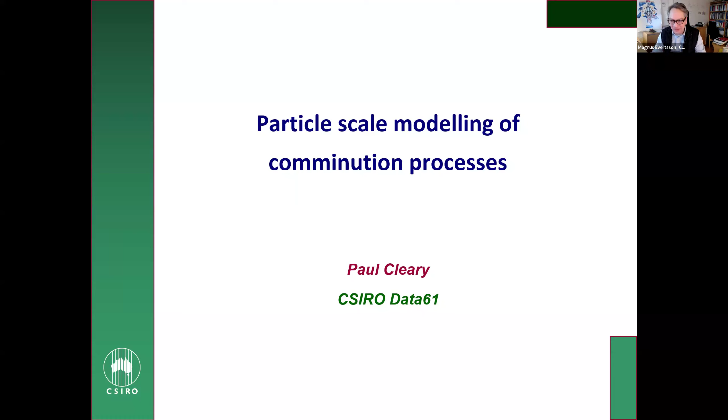Well, thank you very much. I have to start with a comment for Magnus, who looked like he was trying to rotate his camera into the opposite position, so I think he was trying to make us in the Southern Hemisphere feel comfortable. Might have been. Okay, sorry for that, I was changing between my computer and my phone. No, that's all right, it just looked like you wanted to be in the Southern Hemisphere with us. Yeah. I panicked, I didn't want to have the sound echoing.

Anyway, Malcolm, thanks for the introduction. And I have to say, I didn't really need to have quite so much detail about your pajamas, but good to know you're warm.

Okay, let me start then. So the title I've opted for is Particle Scale Modeling of Comminution Processes. A question for whoever's chairing: do you want to take questions as we go through, or have people wait till the end and run out of time? They will wait for the end. Yep, okay.

Okay, so I'll start by acknowledging contributions from collaborators. Core people from our group who've worked on this for a long time: Matt Sinnott and Sharon Cummins, then Gary Delaney, who's worked on the 3D particle breakage, Nick Stokes for a long time, David Thomas, who's our lead software engineer, the CSIRO Workspace software team, as Malcolm mentioned, and Rob Morrison. I think, Malcolm, it's 22 years now, maybe 23, but who's counting? And then I'll show you a few things from our digital human work, in conjunction with Simon Harrison and Ray Callan.

A little bit of an outline of what I'll talk about: introduction to the particle methods, so for us that's DEM and SPH. DEM, I expect everybody knows and is very familiar with. SPH, maybe yes, maybe no. I'll show some application examples so you get a reasonable idea of the breadth of what we do and the sorts of applications we've been looking at, at various stages. Then I'll talk in more detail about breakage in DEM, then focus on a couple of crusher models, and then talk about the complete SAG mill model, which is becoming a very complex model with a lot of moving pieces.

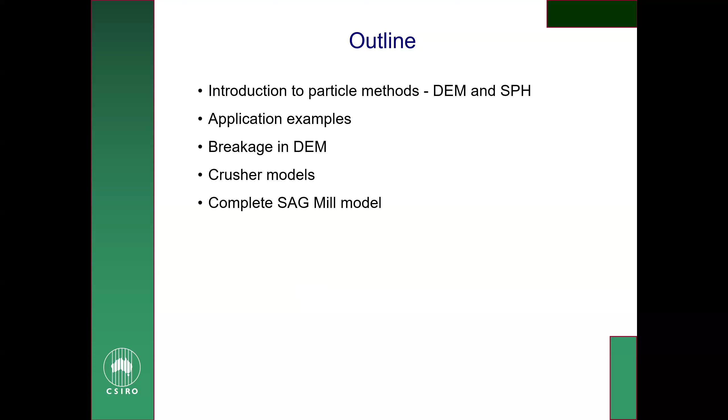Okay, so the particle or computational methods we use, DEM and SPH, provide a way of looking deep inside the equipment and understanding, getting data and information on things you can't really measure or see traditionally. The DEM method, I think everybody should be familiar with - you're basically tracking a whole lot of particles with different sizes and shapes, predicting the interactions with the environment and the collisions between particles. So it's a method to track particles, and collisions is the principle of physics.

The SPH method is a continuum method, but it's a meshless Lagrangian continuum method. We actually use it in several different ways, in particular for modeling fluids, but also to model solids and first principle fracture of solids and elastoplastic solids. Basically, it's a continuum method and you're solving PDEs - if you can write down a normal PDE, or solve it with finite element methods, you can use it in the SPH method. That gives you the advantages of being able to track complex free surfaces at no cost and follow complex multiple materials.

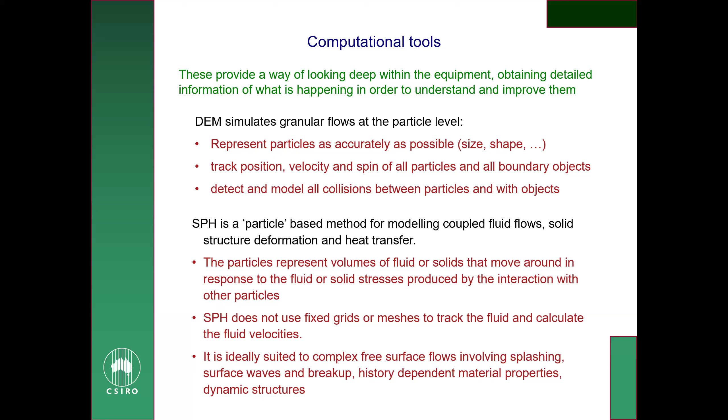So this is a rough phase diagram trying to explain how our methods fit together for what we do. We're using DEM for the collisional dominated interactions for breakage, segregation, cohesion. At the bottom we've got SPH for fluids, elastic solids, elastoplastic solids, membranes, phase change, thermodynamics. And we're often coupling the DEM and SPH methods together in different ways.

We also use some traditional grid-based methods. We use finite element methods for some things, particularly structure deformation, and finite difference methods for modeling gas flows, particularly coupled to the particle methods. Biom is biomechanical models, and I'll show you a couple of those - that's essentially what we use for modeling humans or parts of humans. We also use a little bit of Lattice-Boltzmann methods for permeability measurement, but also for mainstream fluid mechanics.

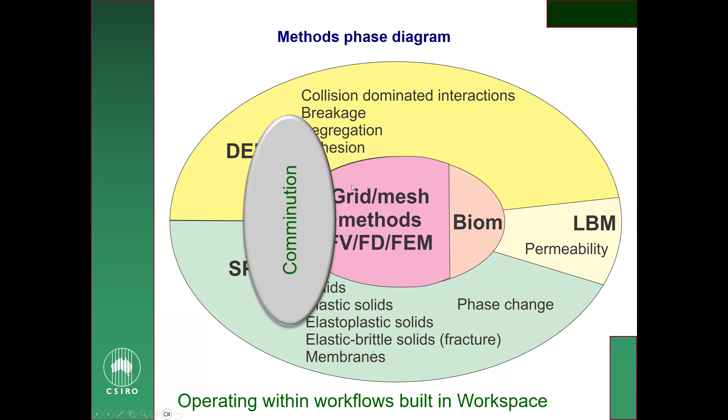So comminution sits across several of these methods, but predominantly uses DEM with SPH, and sometimes a little bit of finite difference if we need airflow in there. The human environment stuff, I'll show you a few examples of that. That covers the areas. We work in lots of other areas, but I won't show those on the diagram.

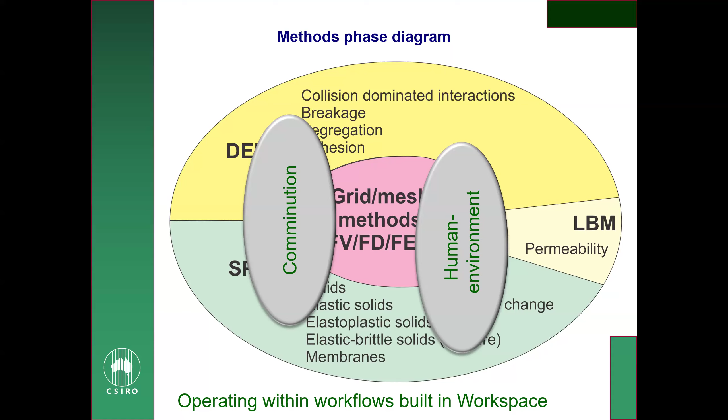Okay, so here's a very simple SPH simulation - this is just pouring milk into a glass. What we've got here is a free surface liquid coming from an inflow. It comes into the glass, hits the wall, spreads out, becomes very thin and undergoes a ligamentary instability, which causes it to break up. When it gets to the bottom, it starts to flow across the bottom, and you get collisions between different parts of the flow, and ejection of fluid in the free surface and splashing.

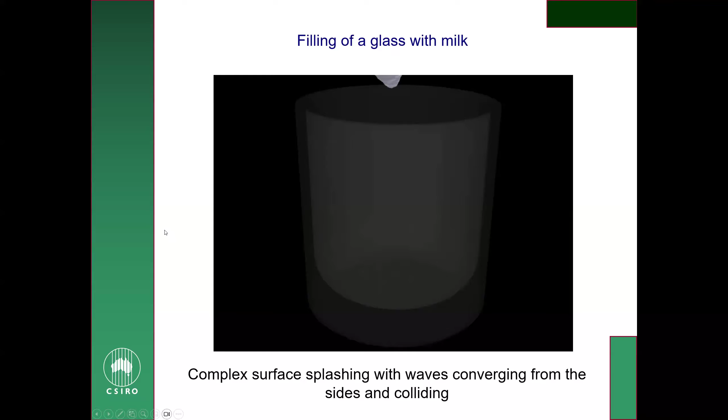Many of you will have seen this one before - it's a common example I use to show SPH for somebody who's not familiar with the method. You can see the complex free surface behavior, the waves breaking, the collisions. SPH is a method that's very well suited for complex free surface flows.

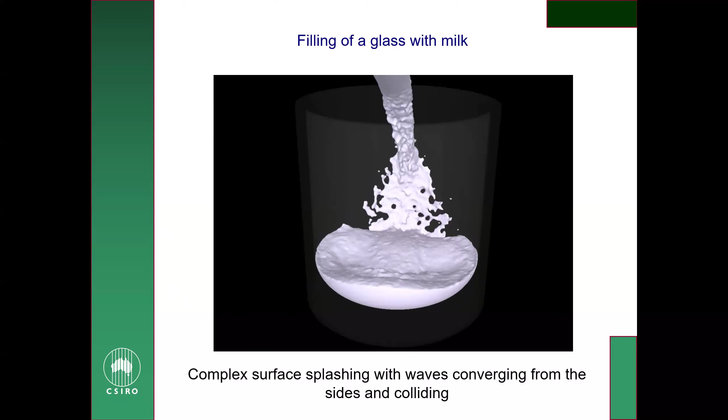A similar sort of disaster scenario - this is an open pit mine where you're interested in slope stability, and if the slope collapses, where that material goes. This is a section of an open pit that's fragmented. The majority of the rock, even though fractured, is still relatively stable and sits at a relatively high angle of repose. But the mobilized rock that has flowed is still sufficient to flow significantly along the sides to fill a reasonable fraction of the side of the open pit, and will destroy any infrastructure and kill anybody in between.

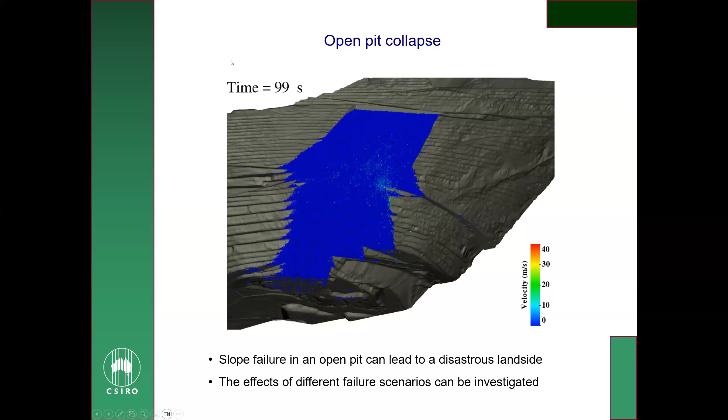So this is an area that we occasionally work in as well, related to mining. Okay, a quick overview across a whole range of different areas here - I won't talk about any of these in much detail. The first one is separation, so lots of different types of machines to separate.

At the top here we have a simple example of a small section of a vibrating screen, spherical particles on the left and non-spherical on the right - I'll set them running. Bottom left we've got a double deck banana screen, and on the bottom right is the banana screen with a modest level of cohesion. You only need a small amount of cohesion, say interstitial fluid, to completely block the banana screen up. You'll see here that the spherical particles peg the holes very well - they get very different behavior.

So shape is critically important in separation flows. In fact, in all the granular flows we're interested in, particle shape is critically important, and you always need to include that.

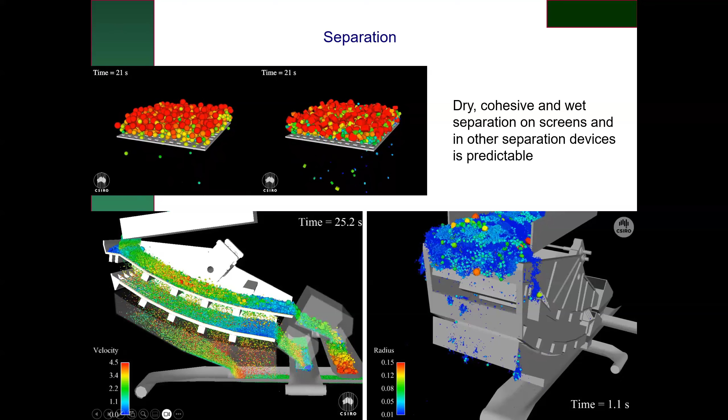We've got a bunch of crushers - gyratory, primary gyratory, cone crusher, horizontal shaft impactor, various roll crushers, hammer mills, shaft impactor, double roll crusher, roll crusher. I'll show you a couple of these later, so I won't show you them now.

Then we're interested in coarse grinding, so we've got sag mills, HPGR, vertical roller mill, various tumbling mills, rod mill - I'll come to the sag mill model and we'll talk more about that there. But also fine grinding, so tower mills, IsaMills, and lots of those as well. So we use these models across the full spectrum of the comminution process.

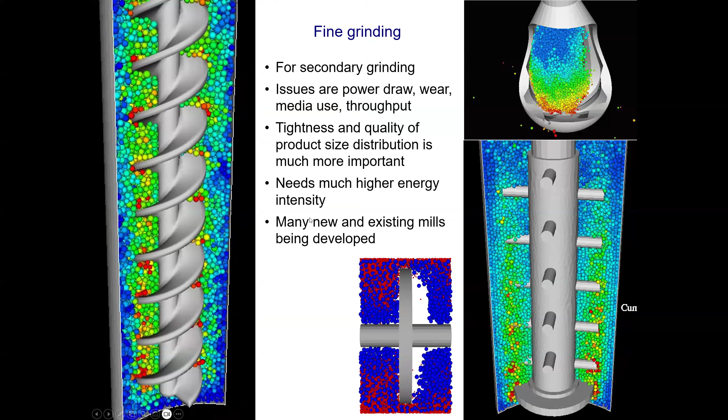We're also interested in mixing, sometimes mixing in the comminution device, but often in manufacturing processes. So this one's a four-blade plowshare mixer. We've got a whole range of other machines there. We're interested in the nature of the mixing process and the quality of the mixing.

Does it fully mix, and to what degree are the dead zones and unmixed regions? So it's actually not a good mixer at all. It's not particularly good, but you can see inside and see what they're doing.

Storage and transfer of bulk materials, so all sorts of hoppers and containment devices, transfer chutes. This is transferring between one conveyor up here for a very complex inverted chute onto another dump below.

Here we have a hopper where once you include the particle shape, you can directly predict arching as emergent behavior, without having to rig the DEM model to try and force it to produce that shape. Again, very, very important in all these applications.

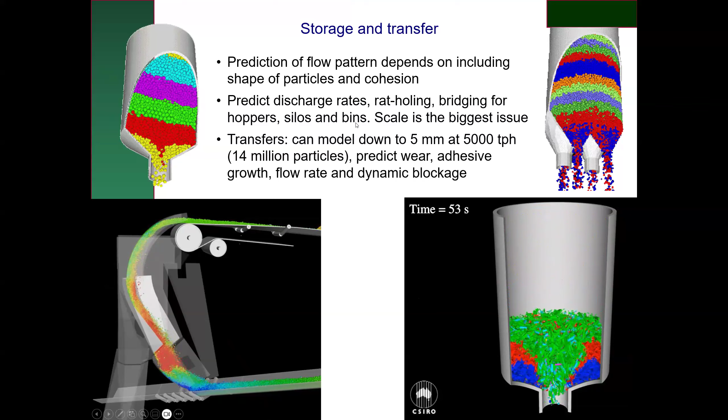Now, this is just the first of the examples I'll show you for the digital human model. These are basically cases where we have a human introduced into fluids or solids. In this case, it's actually Olympic swimming.

The mathematical structures we use here are the same for the mills as they are for, say, the swimmer. So the framework's very versatile, which can range from humans to machines.

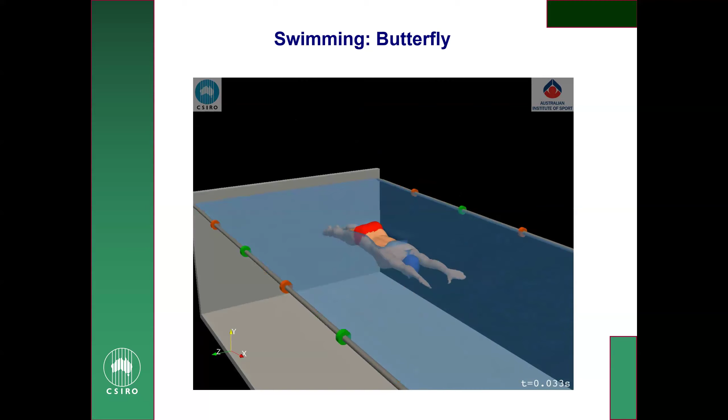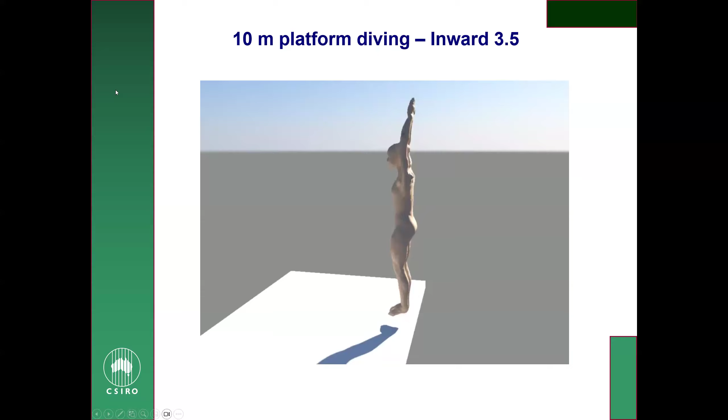Also look at things like platform diving. So this is again an Olympic athlete doing an inward three-and-a-half somersault dive. Complex biomechanics followed by the body doing complicated things, interacting with the water.

The last of the general examples I'll show is additive manufacturing. So this is a particle bed. In this case, it's titanium grains, which are about 20 microns.

We've got a laser. In this case, the laser is rendered as purple, so you can see where the laser heat source is. The laser deposits heat on the surfaces in proportion to the view factor of the grains.

The grains are modeled as SPH clusters of particles, and that means that we have both the discrete nature of the grains, but we also have the continuum model within the grains, which allows us to predict the internal convection or conduction and melting of those grains.

And then once they're liquid, we get a transition from a granular system locally to a liquid system. The liquid flows under pressure from the laser and forms a solid.

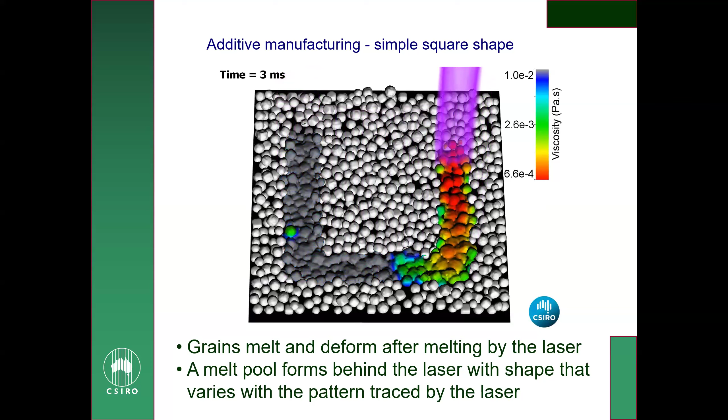So I'll play that, we'll see how it works. You'll see the laser moving on. The colours show the viscosity, which is red for free flowing, and the other colours as it solidifies.

The dark grey shows you the material that's really solidified. You can see the dark grey is what the particles are all smeared and merged to get to from the original grains. The way this process works is you lay down a layer of beads, you do this process.

Then you put another layer of grains on top of those, and then you do it again and build up the layers progressively. So this model is a sort of hybrid DEM-SPH model.

It's got DEM components because it's dealing with grains that are stuck together, but because we want to do the internal heat transfer, the solidification and the melting, and then solidification again, we've got all the SPH continuum parts to provide us that.

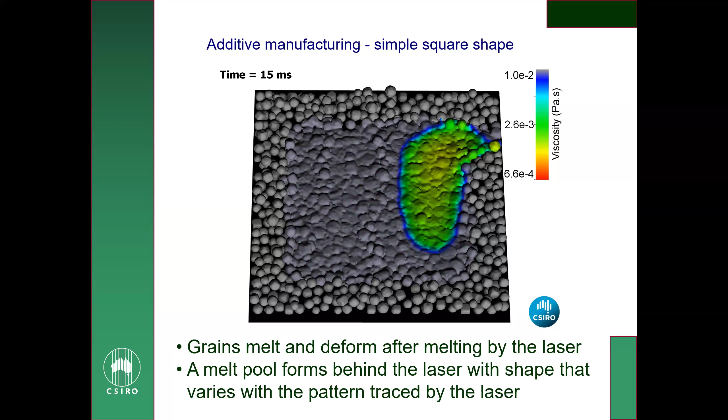Okay, so talk about breakage, rock breakage modeling in DEM, at least the way we do it. This is the basic elements of it without too much detail.

So for compressive breakage, we're using an elastic threshold strain energy. And for impact breakage, we're using the damage energy, or incremental damage, which is the energy in a collision that's above an elastic threshold, which everyone tends to call E naught.

So in the impact case, we're measuring the accumulating damage energy. In the compression breakage case, we're looking at the elastic strain into particle contacts. And those give you the information about when a particle should break.

Once a particle is broken, then what we do is we replace the fracturing parent with an appropriate assembly of daughter particles, all of which are non-spherical. They're packed into the space that was originally occupied by the parent.

Progeny size distribution essentially comes from the more recent updated version of the T10 model, so basically driven by drop weight or breakage test data, but including size effects. So we have an extra parameter on top of the traditional ones that takes into account the size dependence of the

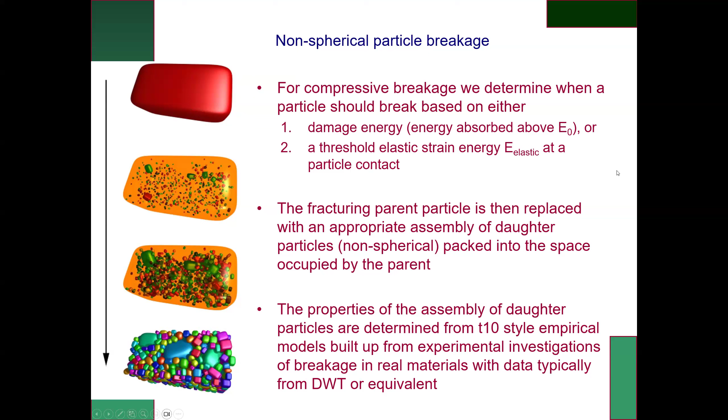Just to show you how it works, this is an example of two relatively equal-sized particles colliding at high speed. There's 100 millimeter particles, resolved down to 1 millimeter.

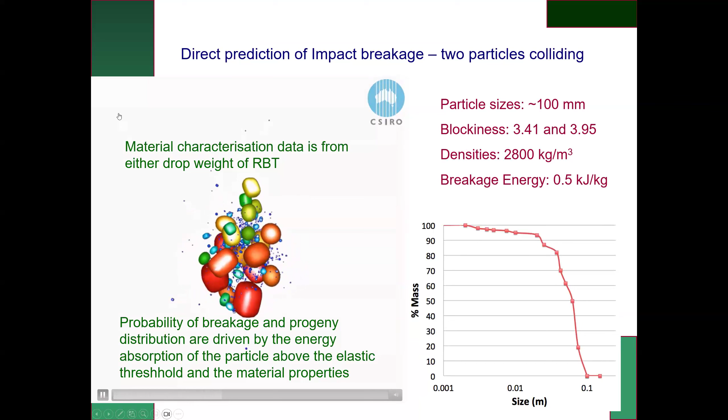And you can see the replacement models that occurred instantaneously. The progeny are then free to move, conserves energy, so the original energy that remains above the energy dissipated by the elastic part of the collision remains energy inherited by the progenies, allowing them to move into each other and spread out with that energy.

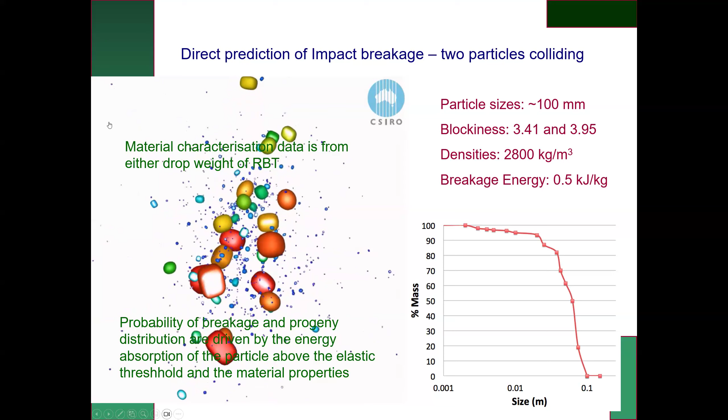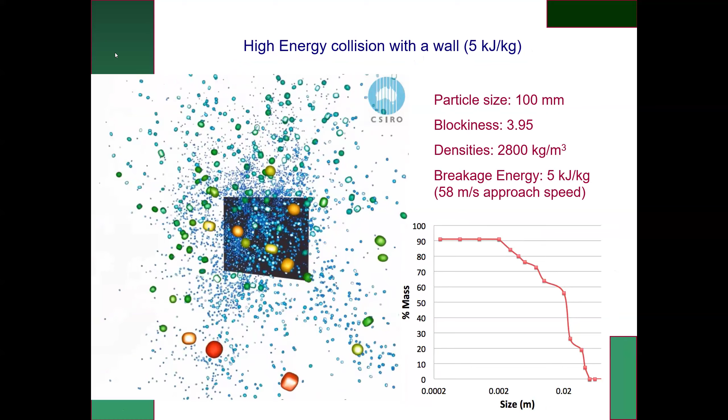So I'm going to talk about the size reduction mechanisms that we're using now in the DEM model. We've got 5 of those, depending on how you count them.

So traditional single impact body breakage is mechanism 1. Mechanism 2 is the incremental damage theory, which essentially is body breakage as a consequence of the accumulating damage from the energy above the elastic threshold that it accumulates.

So essentially each time you have a collision, there is a probability of breakage that depends on how much damage has occurred. Then if it breaks, the accumulated damage energy then determines the breakage event, which controls the size distribution of the progeny.

We've got 3 surface loss mechanisms. The first one we call chipping. This is for an angular particle, the preferential loss of corners and edges due to impact.

So if you have a particle with a sharp edge and you hit it, say 45 degrees near that edge, you can actually shear off a whole large piece of it. So you don't necessarily need a lot of energy input, but you can remove quite a bit of mass from it, and its impact is to round the particle by removing the corners and edges quickly.

So chipping is a more efficient mechanism, but it'll lead to a rounded particle, and at that point the chipping slows down and eventually won't occur.

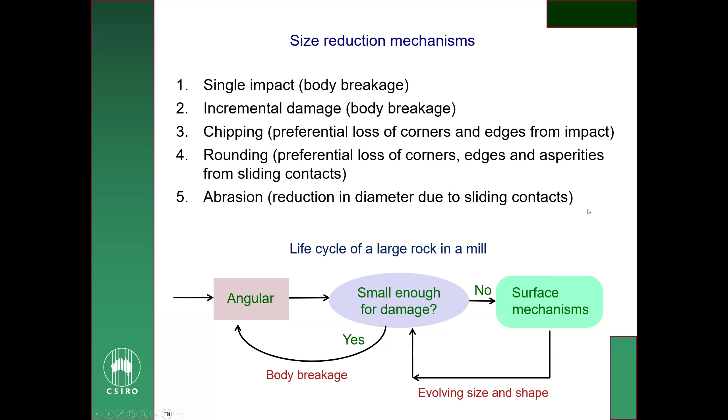So the surface loss mechanisms are all the accumulation of very large numbers, hundreds or thousands, of little impact events, each of which takes a little bit off a corner or an edge, and then progressively leads them to become rounder, as well as grinding down to become smaller.

Now, if we had the incremental breakage mechanism switched on here, those particles are now small enough that the energy delivered to them is big enough that those particles could then break. This example is just showing the surface loss mechanisms.

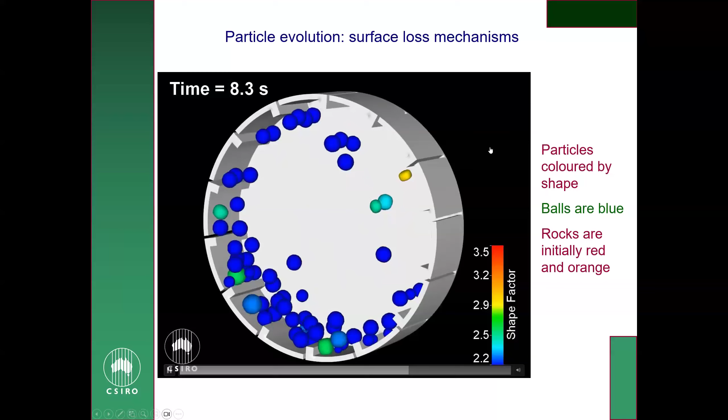Okay, so now we'll jump over to a few crusher examples. The first one's a jaw crusher. This is, as usual, using the particle replacement model I described. It's a compression crusher, so the determination of breakage will be done by the stress on the particle. As usual, the progeny is determined by the T10 model, and again, particle shape is critical.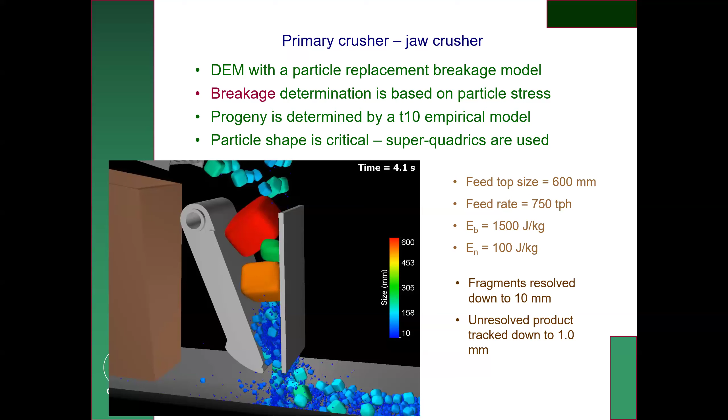Okay, now the next jaw crusher I'll show you is quite a different one. This is the last example I showed you from the digital human side, a complete model of the human mouth. Essentially, this is where the jaw crusher gets its name from.

You've got two opposing sets of surfaces that cyclically compress and apply stress to the material in between. In this case we're not showing the lower part of the mouth, the upper part, or the teeth, but there's a full set of teeth and a full biomechanical model containing all the details of how all these surfaces move.

One thing that's different to, I guess, an industrial jaw crusher is that the tongue plays a critical role here. It repositions the food and does a whole lot of sorting, a bit like an online sorting device, but also preferentially rearranges the larger fragments to improve the re-breakage on the next cycle of the crusher.

The material in this case is an Oreo biscuit, so you've got two elastic brittle materials with an elastoplastic cream filled material in the middle. This is an SPH model with some DEM components. I won't try to explain too much about what that means, but basically this is using an SPH elastic brittle model prediction.

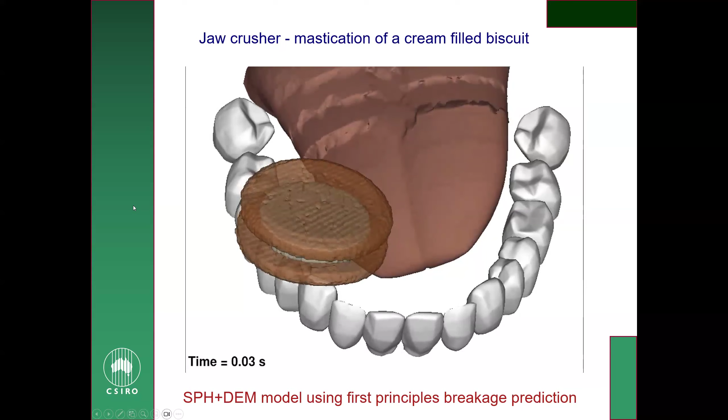I'll just show you a few cycles of the jaw crusher working. You see the tongue moves over and holds the food in place. There's a cheek on the outside holding it in place on the left, so you get primary breakage. The elastoplastic cream is sticky and sticks some of the pieces together. The tongue is pushing the largest fragment back over the teeth, trying to position it for the second bite coming down.

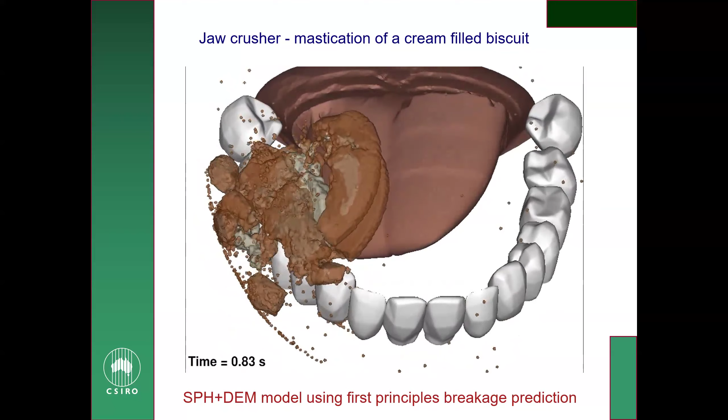The human jaw crusher has vertical movement, but also has lateral side-to-side movement as well. So we can make quite complex breakage predictions and size distributions, and lots of secondary physics here which I'll show.

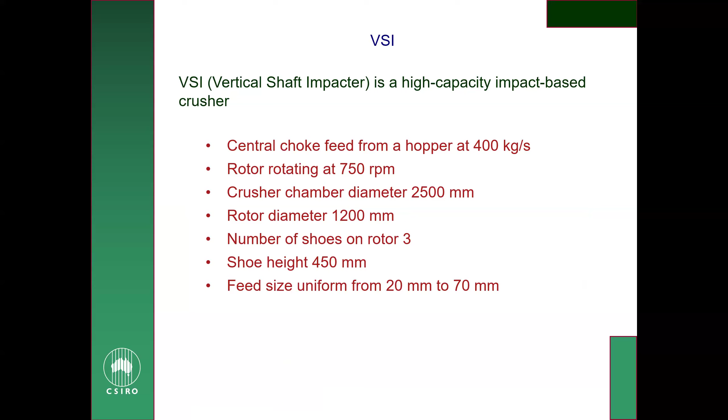Okay, so the last of the crushers I'll look at is a vertical shaft impactor, so a high capacity impact-based crusher. Essentially, choke feed from a hopper at 400 kilograms a second, rotation rate of 750 RPM, 2.5 meter diameter crusher chamber, rotor is 1.2 meters, 3 shoes on the rotor, feed size is 20 to 70 millimeters.

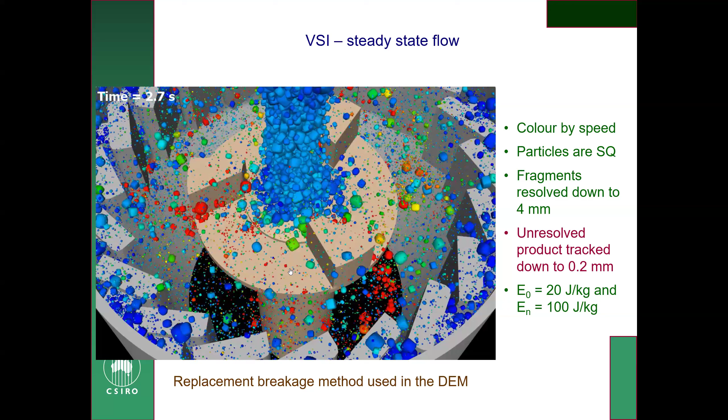Here's the steady state prediction, so it takes a while to get to steady state. You can see coming down the center here, you've got the choke feed from the hopper. Particles move onto the rotor. You can see they are picked up by the shoes, high-speed jets that are thrown out towards the anvils.

The environment's relatively dense, it's not at all a dilute flow, so there's significant collisions between the outgoing fast-moving particles and the sea of relatively slow-moving fragments from all the previous events, and so there's a lot of secondary breakage going on.

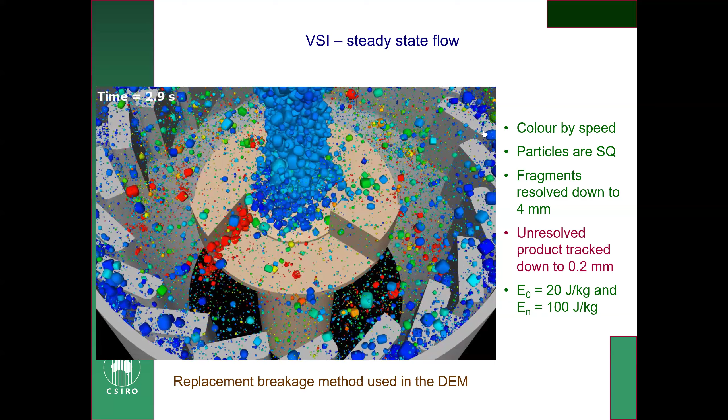I'll show a couple of other views looking from the top with half the charge section, so you can see very clearly the flow into and along the rotors, and then the bands of high-speed material flying into the anvils.

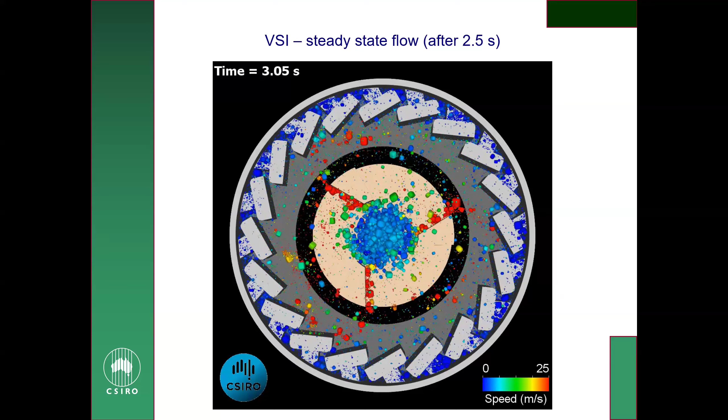This last one's a front-on view, gives you a reasonable idea of the density of the flow and all of the material that's particularly trapped above the anvils and very slow moving. So something of that material has quite a long residence time. There's a lot of material that's actually essentially trapped down at the side of the rotor and back of the anvils.

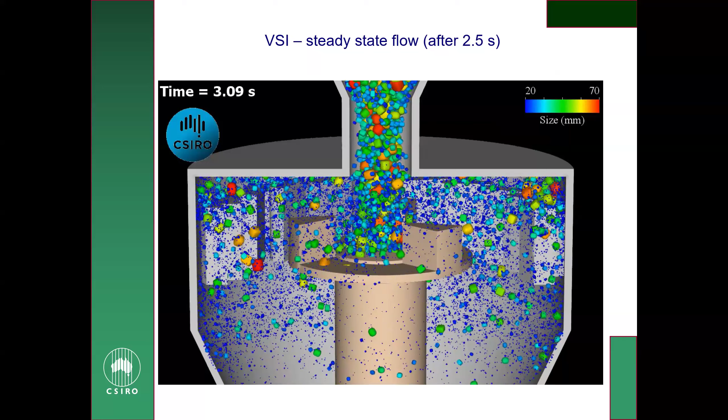Okay, so this is a snapshot that shows the particles accelerating outwards. You can see the 3 bands of high-speed material, and you can see a lot of the high-speed fragments from the previous breakage events that are rebounding off the anvils.

Just to give you an idea, there's about 225,000 breakage events per second going on here. Simulations take about 20 seconds to get a good statement of this data.

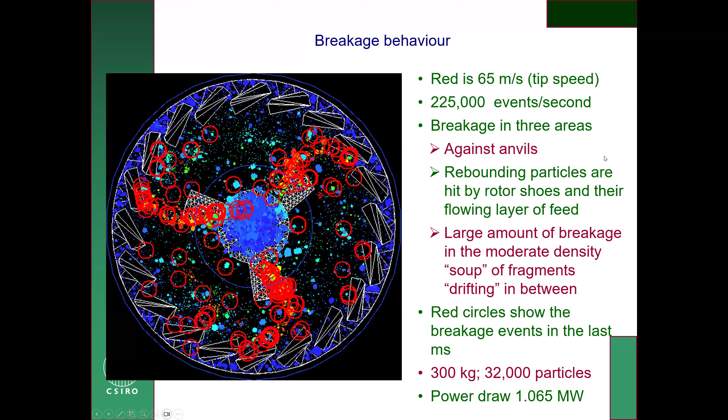About 4.5 million breakage events with up to several hundred progeny in some events. From that, you get predictions of power draw and other things, like the model for operation.

One thing that's very important with the way our model's constructed is that we have information on the resolved fragments. There's always a size that you're prepared to resolve down into the DEM. In this case, it's 4 millimeters.

But we have all of the information about the finer progeny, and we can use that to get it through the machine, and then predict the fine progeny part of the distribution as well. We're ignoring further secondary breakage of those by hitting things, but very, very small particles don't tend to have a lot of such collisions.

So the way we're doing the prediction of the unresolved section, what that means is that we can predict from the full feed size down to, in this case, 200 microns, so we get a full size distribution.

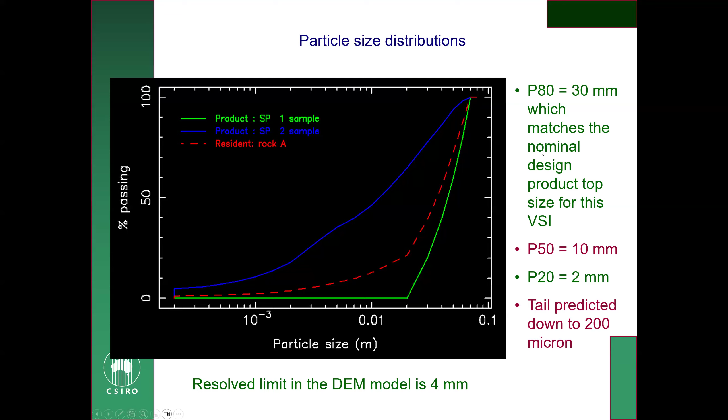The core of the method is, of course, the DEM method using non-round particles. That's then fully two-way coupled to the SPH method set up to model viscous fluids. Full two-way coupling between those components.

DEM is then connected to the breakage model, as it was to the crushers. So all of the resolved DEM particles that come down here, we're identifying whether they should break and when they should break, and then this is all the 5 breakage mechanisms.

So single particle breakage, incremental breakage, and the 3 surface mass loss mechanisms. So all of those are occurring. We're continuously modifying the size, distribution, and mass of material in the DEM model.

Coarse fragments from the breakage are always returned back to the DEM model. The fine fragments that are small, below the resolved limit, are taken out of the DEM model and put into the SPH model. So the SPH particle represents a volume of fluid, but it also carries the

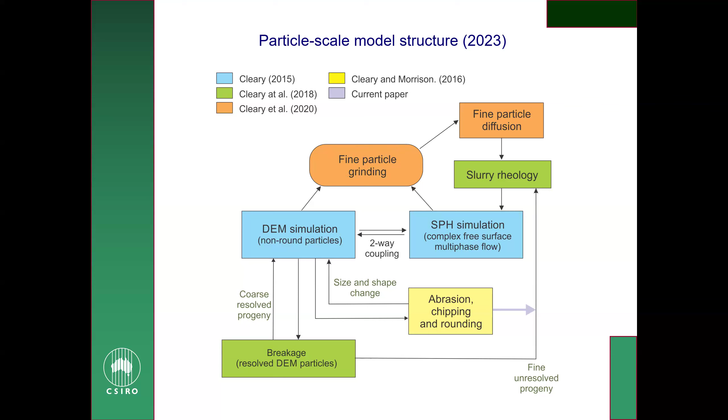So what we've used to do the fine grinding predictions is a population balance model. Instead of using a single population balance model at the system level, what we've done is embedded a particle population balance model in every single SPH particle.

So let's say there's 1 million SPH particles in the fluid, every one of those has its own embedded population balance model, doing its own calculations for the effect of the grinding at that location.

There's a number of issues that are normally identified with population balance models when trying to use them on mills, and a lot of those relate to non-first order grinding kinetics, but mostly that relates to very coarse particles.

Other problems that cause us to think this isn't the optimal way to go: when you do the population balance model external to the particle-based simulation, you're essentially making assumptions like the charge is fully mixed, or sections of charge are fully mixed - that all parts of the charge sample all parts of the available phase space. But in reality, a lot of particles are actually trapped in sub-regions and only sample very specific subsets of the overall dynamics, which affects the breakage kinetics in those regions.

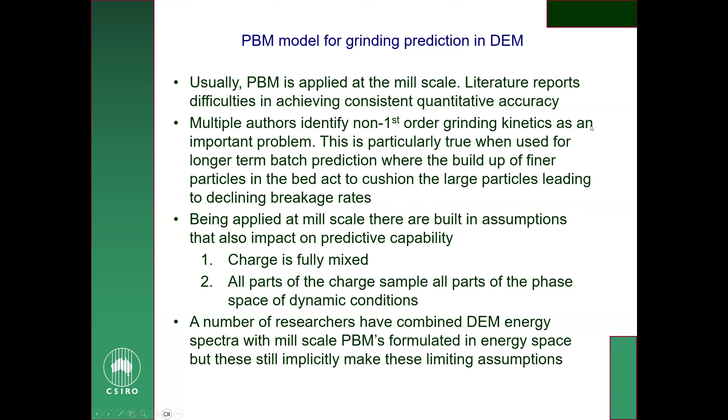In the complete particle scale model, we have an independent population balance model with every SPH particle. Local grinding prediction means there are no assumptions on global mixing or what's happening in the phase space, because each SPH particle is only a very small local calculation with a very small body.

Coarse particles are being explicitly resolved in the DEM. The breakage is being done in the DEM, so there are no coarse particles in the population balance model, so we don't have problems with the non-first order grinding kinetics. The population balance model is also generally known to work better for fine size fractions.

So where we're applying the population balance model, we're using its absolute strengths, not where it's more difficult to use.

The form that we're using is from Capece 2014. It doesn't really matter which one you use, as long as it's an energy-based one, and you can swap between those if there's good reason.

Selection and breakage functions are also a matter of choice. The important thing here is that we're using the energy dissipation at every point in the DEM model, so we know the energy dissipation from the solids, from the rock, and from the balls.

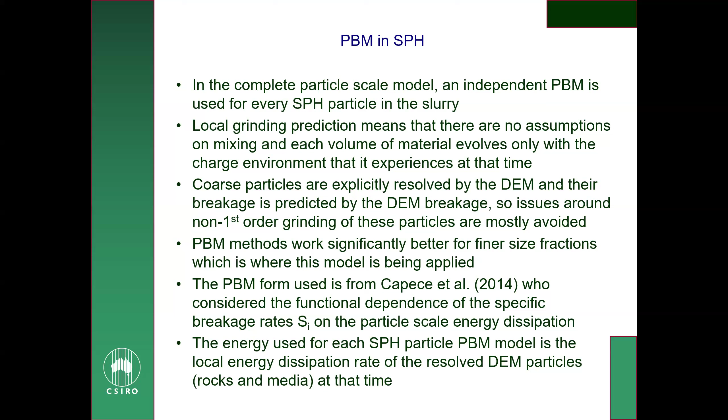I won't go through the equations, but these are sort of standard population balance equations, and we use essentially pretty standard selection and breakage functions. So the model's not dependent on these specific choices.

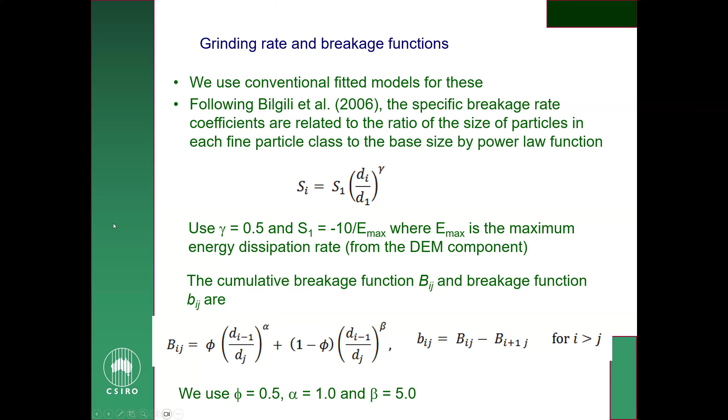We've also got a slurry model relating the viscosity to the solids loading in the fine size fraction. There's a strong disproportionate effect of the smallest fines on the viscosity, so if you load very small size classes, the viscosity goes up much faster than just from the solids loading alone.

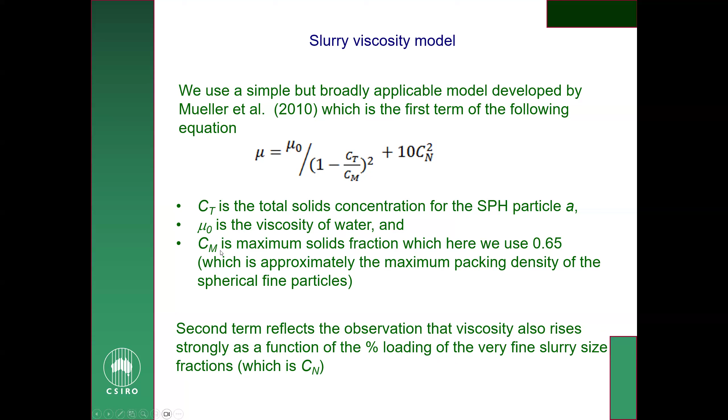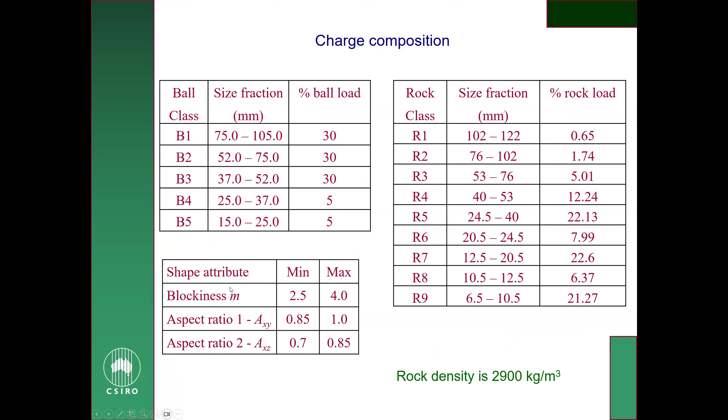All of these bits sit in that slurry grinding model that was in the upper part of that phase diagram. Just a bit more detail: we've got size distribution for balls, size distribution for rock, shape distributions, fine slurry sizes, and size fractions in the balance model, so that the rocks as they enter the flow then break down.

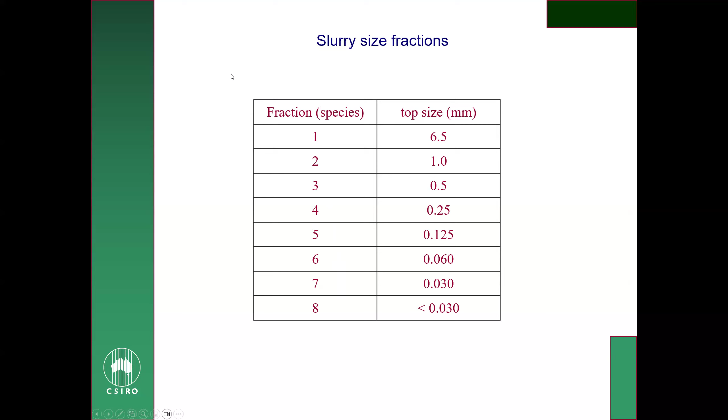Okay, so that's more slides than I normally show without videos. So now we have had some videos.

This is the Hardinge mill that Rob and I have been working on for years. We've been updating and expanding the computational framework, but the model itself is pretty much the way it was 20 years ago. Here we've got about 30%, 39% solids loading, with about 160 litres of water initially in the mill. Solids are shown here flowing slowly.

No particular surprises here. Everybody's seen lots of models in a central slice, so the slice for a couple of models is fairly similar.

The differences where it becomes more interesting is what the slurry distribution looks like. The slurry turns over quite quickly, with relatively high permeability through the charge that turns over the surface, and then there's a layer very close to the wall that separates, so you've got some slowly distributed cataracting stream.

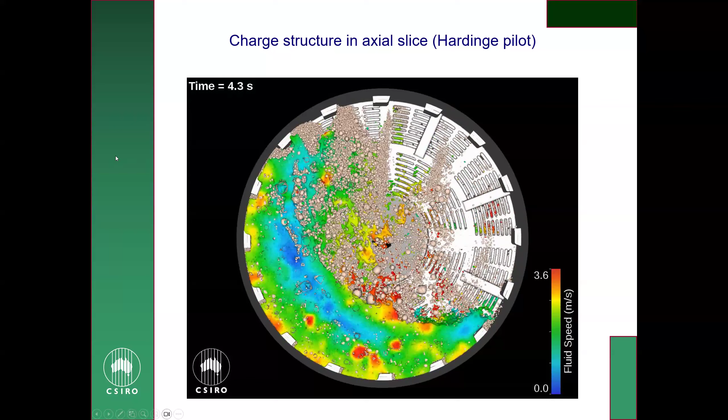axial transport of solids and liquids through the full mill. One of the things you can see is that the flow is really very complicated. It's a significant flow off these end-wall lifters, and they come down into the middle of the line. It's actually very poor mixing for the transport across the central line.

So you get reasonably quick mixing with cycles. That flow basically throws stuff into the middle and circulates back into the recirculation zone on its side. But it's quite difficult to flow across that mid-plane.

But the complex lifter geometries produce really quite complex axial flow patterns. You can see here that there's fluid going sometimes one way, sometimes the other. There's no simple flow pattern between the slurry edge approaching the toe position, which reflects the very large variability of all the conditions.

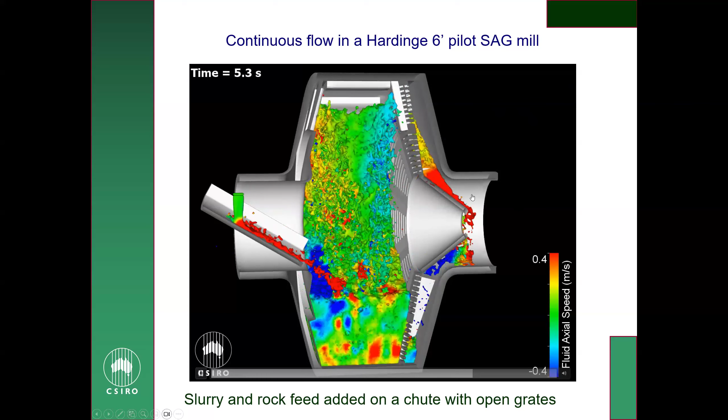But we're also predicting the flow through the grates, the flow then up and down.

This is a steady state of what's in the pulp chamber. We've shown this type of picture before, but it was for very early stages. What we find is that when we start the mill off with water in there, there's quite a large surge of water into the pulp chamber to start with, and then that declines over time. This is once we've got to steady state.

So the brown pebbles are what's got through the grate slots, and is the slurry that's going through. The slurry behavior is extremely complex. We're still trying to understand exactly where and how the slurry goes through the grate panels. There's no mechanism built into this design that stops backflow from the pulp chamber back into the grinding chamber.

So we can see strong backflow into the grinding chamber here. We can see flow into the pulp chamber at a number of different locations, and we can also see, when we've got large deposits like this, the pressure mechanism for some slurry back through the grate. So it's really quite a complex flow between the grinding chamber and the pulp chamber.

We're still trying to figure out how to do the analysis of that. So one of the challenges we have is...

Now, on this mill, it's a very geometrically complex mill. There's a lot of things happening in a lot of places, and we're looking at slurry, all different size fractions of slurry, all different size fractions in the rocks, the breakage—they're all very spatially distributed, and we also don't know what the steady state conditions for this mill are. So there's an enormous amount of data and an enormous amount of complexity, geometrically and from a process perspective.

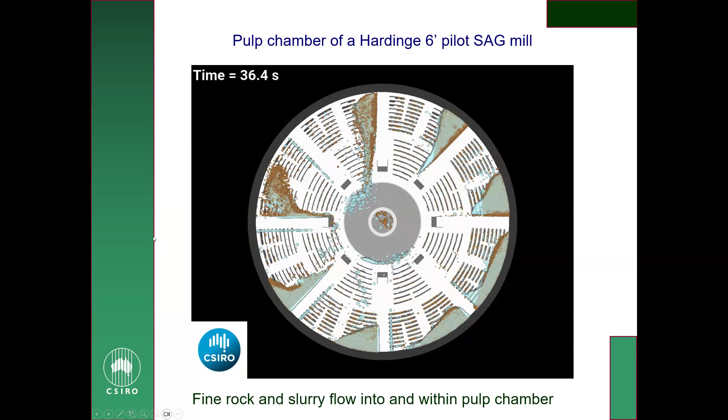This is now just looking at one slice, looking at the importance of damage accumulation. One of the reasons why we've done this for a much longer time—this is a picture at about 1 second.

One of the things that's interesting is that the intensity distribution of breakage events coming from incremental breakage is strongly emulating that energy dissipation distribution. What would you expect in this case?

Where the damage accumulation is particularly important. This is after one revolution, so you can see all the particles have circulated around, and a lot of the particularly bigger particles have accumulated some damage on the previous pass.

Everything that's coming in is coloured by the total damage energy absorbed. These particles have not had any collision, so they will have no damage energy. But after a full revolution, you'll see that the particles in the stream, particularly the larger ones, have accumulated quite a bit of energy.

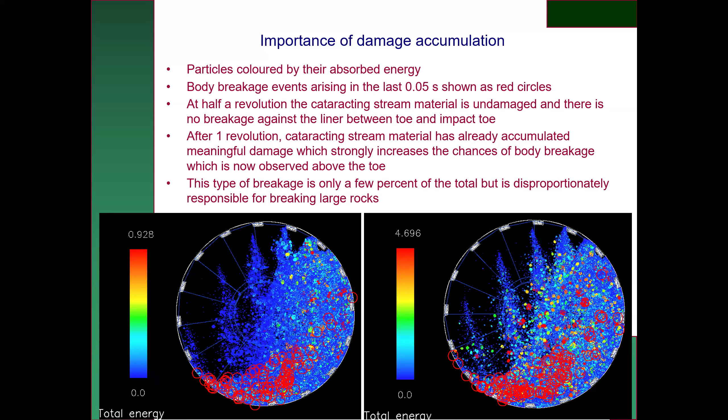That breakage of coarse particles in and above the toe region is to understand the breakage of the coarse size fractions and the streaming of mass from those coarse fractions into smaller ones, which are predominantly dealt with by surface attrition.

Now, in this particular model, we can accelerate the rate of— Sorry? I'm sorry to interrupt.

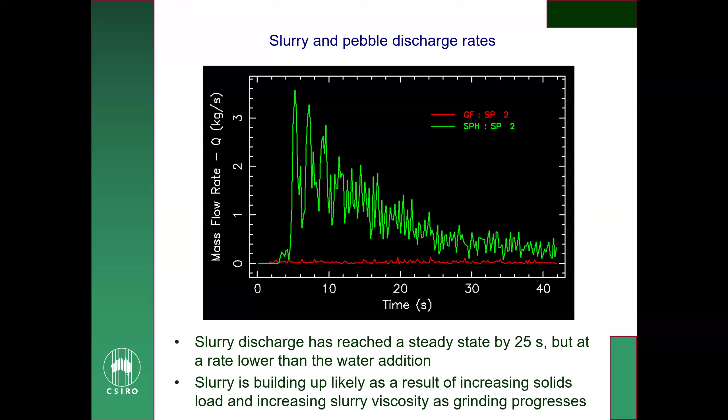So two-thirds of the flow is not coming out—it's actually building up in the middle. That's most likely because the solids load is still going up, and the grinding is causing viscosity to go up.

Okay, so very quickly now, this is just looking at the slurry phase grinding—looking at the overall viscosity, which is a function of the solids loading. All the coarse particles are breaking, the fine particles are grinding, so viscosity is a measure of the distribution of those solids.

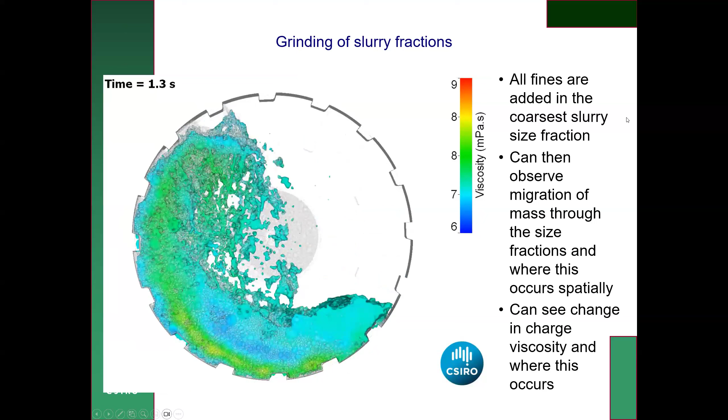We see this all the time: we get generally a preferential band of high viscosity in that region where breakage is high, and a reduced viscosity in the core. This is just the viscosity at very long time, so I can't stop that one.

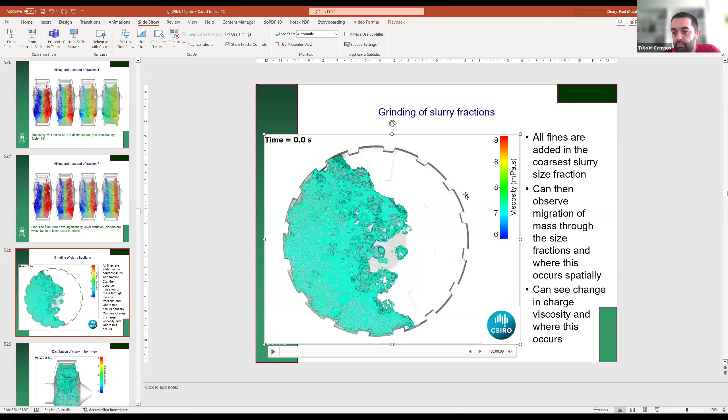Does anyone have a question? I'd be satisfied or desperate to leave. I do, of course, have a number of questions in my head, but I thought I'd give other people a chance.

I think, Paul, the tour de force is, as usual. You can always call me back another time and we can talk about it. We don't have to talk once a year. Yeah, we always avoid each other in Australia.

But it's really fascinating, that journey of putting together, as you showed, the incremental parts of the system to gradually build up as full a picture as we know. Incredibly challenging and interesting problem, as I introduced it, and you got down to the level of a local population balance model to solve the fine end of the system. I think that's the pathway, with the virtual comminution model concept of building understanding to then design the future. I guess the question is, have you applied this methodology to any designed machines, or someone's crackpot idea or good idea of what a new machine might be, and then tested in advance whether the concept is useful, viable, going to be any better? Have you managed to do any of that yet?